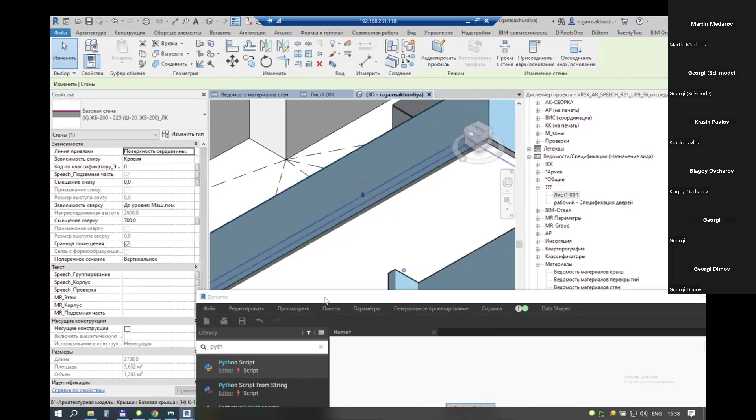I just need some parameters. I want to show you some parameters, and after that we will make the new task for ChatGPT. For example, let's say we need walls with more than 5 square meters area. So: filter me all walls with more than 5 square meter area. The name of the parameter - because I'm using the Russian version of Revit, area is called not 'area', it's called another word, but the idea is the same.

I'm just trying to help ChatGPT understand my case better. Now it's starting to write the script, as you can see - it takes just a few seconds to understand what you need. But sometimes, of course, the result isn't clear. As you can see, it already created the code for the 5 square meter filter, and it's using the lookup parameter, which I'm using in my Revit. If you're using the English version, of course, here it will just say area.

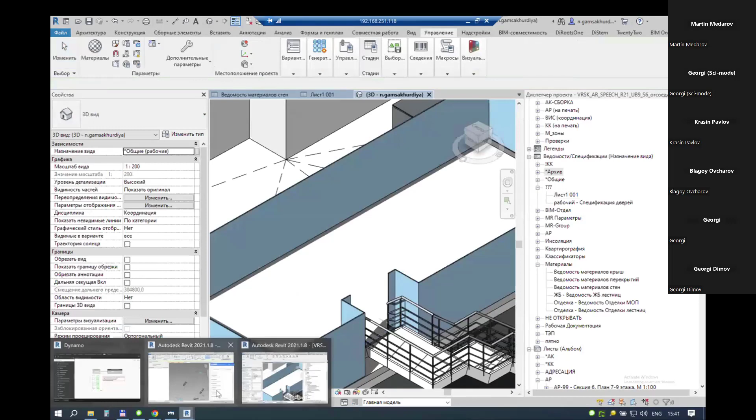I hope it's not crashed. Where is my Dynamo here? It's here, let me find this area. I want to just check if it's everything right or not. Oh my God, how it makes things more slowly.

Yeah, everything's right, as you can see, more than 5 square meters. Awesome, so it's working. And now after that, we can do more and more things.

For example, you need 5 square meters, maybe you want to change the name or something like that. For example, we have the naming of our walls and we have to change the naming. You also can create the program, you can ask ChatGPT to change it.

Let me try now what I can do. Actually, I don't have any ideas. Maybe you guys have ideas, and we can try some simple things which won't take a lot of time. We can, for example, ask...

Give me back walls only in level 3.

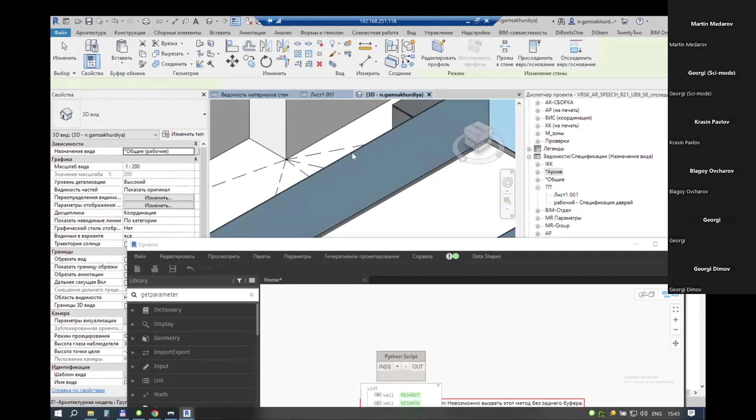It's really hard because I should first check how the level is called in my case, because, as you know, if you're working in Revit, you can change the name of the level, and sometimes it won't be like level 3, it may have another name. For example here, as you can see, it's a really different name.

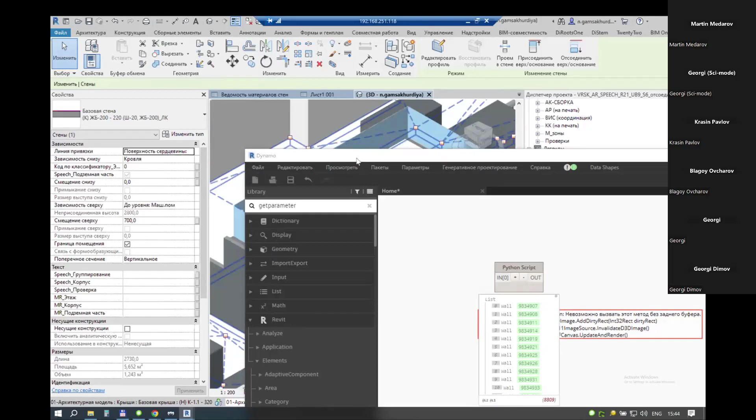Give me a second, I will select another wall. You can ask why it's really working slow. Actually, I'm showing you everything in a really huge project, it's like thousands of square meters, and that's why it's not working well.

But I want to show you how powerful it can be, for example, using a Python script with AI, to achieve your results.

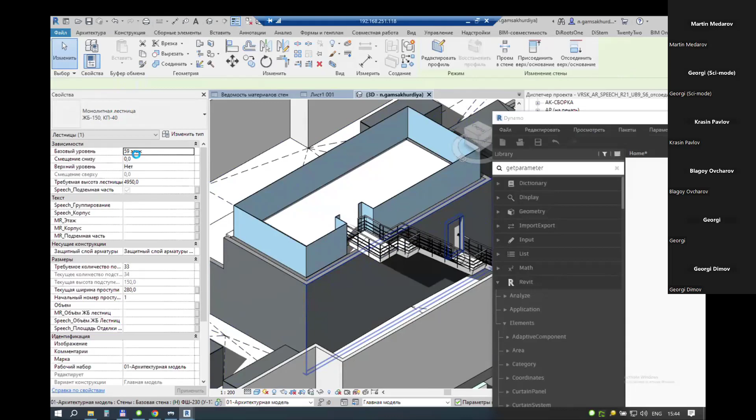Give me a second, here's the wall, and I want to check. Okay, I know now how to call the levels. Level 3, which has the name like this. And now it will be changed with a Python script, and we will see how it's working.

So here's our code being written. By the way, all this code you can, of course, use not only for Dynamo, I'm just showing you the example. You can directly ask, for example, for PyRevit. As I know you already know what PyRevit is and how to use it.

And you can, for example, not write for Dynamo, but ask to write for PyRevit, or write for Revit... I mean PyRevit.

Just a second, done. So here's the string, as you can see already. And let me just replace this code. Replace, and maybe we'll get it from the first time.

It says level not found. It can be like this, actually. It can be, but I don't believe that.

Let me change level 3 to the level 58, 59, because I know exactly we have walls on this level. Let me do like this. Oh, and we found it.

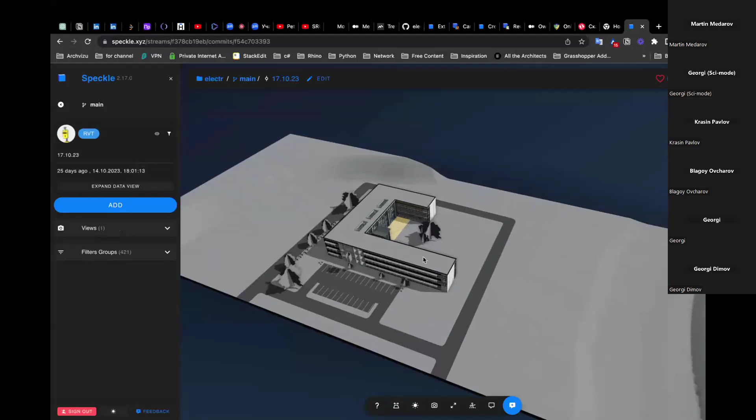Here is our model, as you can see, and all information here we have. For example, if I select this wall, I can see all information inside of this wall. If you think that's it, no. Under the parameters, you will find more and more parameters of what we have inside the model.

As you understand, we can actually create some program by AI, which will work with all this data. So you can go back, for example, to Revit. I will close Dynamo, we don't need it right now.

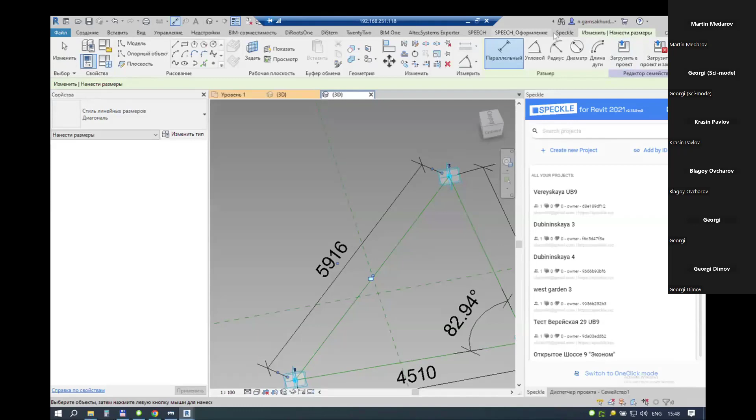You can go to Revit and use, for example, the plugin which is here, Speckle. You can send your model, and after that it's like the database. You can work with all information from this model. You don't need to use Revit to analyze your data. You can send it somewhere and work without the problem.

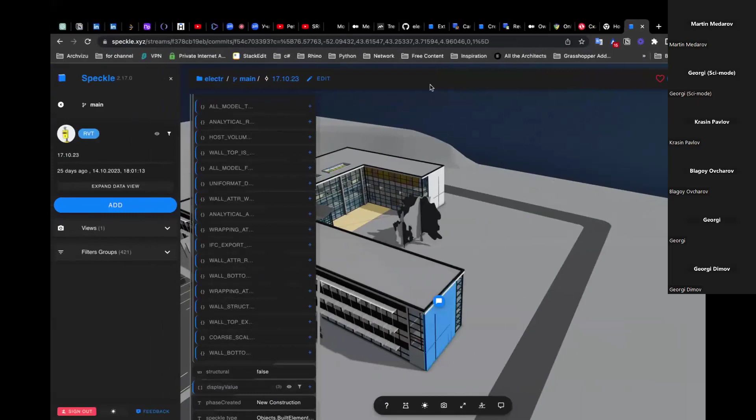For example, here I have my model, as you can see. Let me show you a much bigger model, because this one is small, and I don't like when the model is small. Okay, let me show you the big one. Here we have the model.

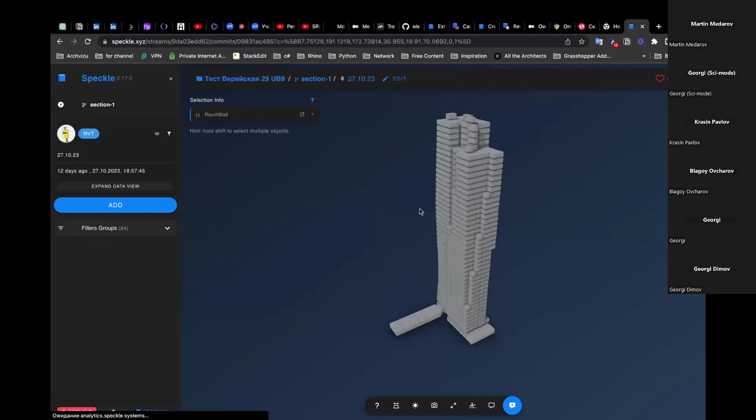We have two sections - this is section 1. Let me open it to show you. Here, inside Speckle, I have only the rooms because I want to calculate only data from the rooms - that's my goal, as you can see. All the rooms were exported from Revit, so now I can work with this data.

So what I can do - I already wrote the program. Where's my PyCharm? Here is my PyCharm, and you can see it, Speckle AI, the name of the program. Let me start this program. For example, what I want to get from this model - actually, all this program I wrote by AI without anything, only AI. I didn't write any line of the code myself. Only AI wrote all this code.

If you want to know how I did it, you can check, for example, my blog - I don't know, maybe I will share it later, and you will see my journey how I did it. I started from scratch, as you can see, and after that I was asking for ideas on how to do that, and step by step, from this small piece of code, I created this huge one, which you can see right now on your screen, with a lot of different modules.

And now, what can this code do? For example, this code can analyze the data which I sent from Revit to Speckle, and as I said before, I'm using Speckle like a database. Now I can get some information like file name, room numbers of the rooms, and so on.

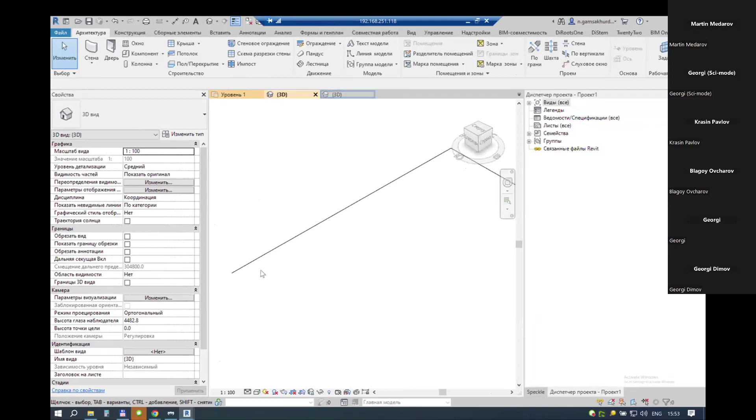And as you can see, not any big problem. It's really nice because I don't need to go back to the Revit, I don't need to open each file, I don't need to open each schedule and check my data. I can do it directly in Speckle. So why am I showing you Speckle and why am I telling you about it?

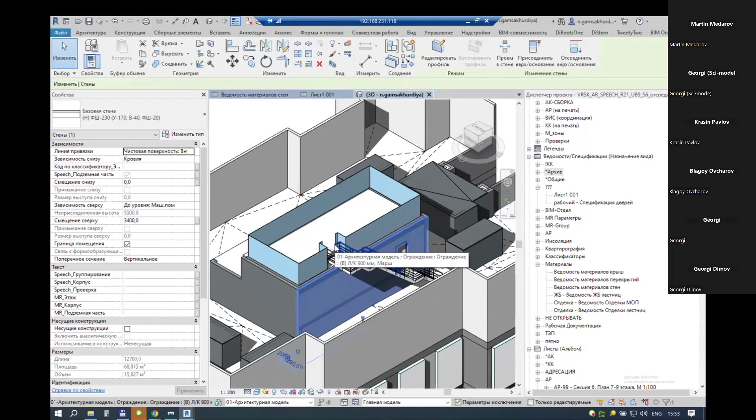Because when you're working in Revit, if your project is not big, you can create any script with AI and Dynamo. You can use Dynamo, import your script, and it will work perfectly. When you're working with a bit bigger project, it will be nice to use PyRevit. But when you're working with huge projects, you need somewhere to store your data.

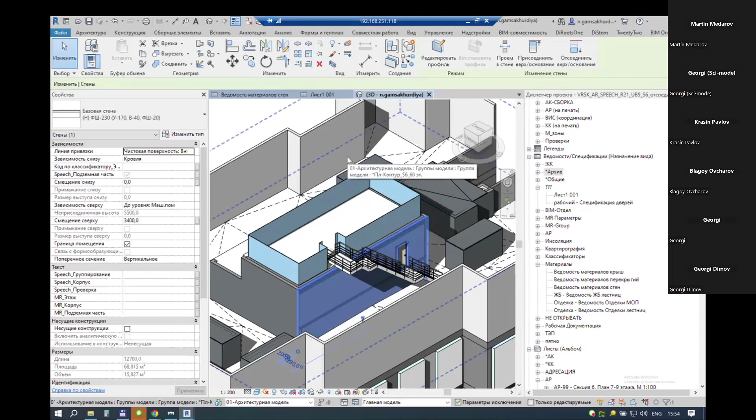Okay, I need a bit of water, and maybe any questions at this stage.

Sure, take your time. Thank you for these very interesting insights. In fact, there was a question here in the chat. Can you directly see the chat, or do you want me to read it for you? It's okay, I can read the chat. Give me a second. Where's my chat? Here, chat.

Bing... no, I didn't use Bing. You mean Bing like AI, or does Bing have its own AI? They're actually using Microsoft working with OpenAI. So Bing is using OpenAI, equal to ChatGPT, but a much lighter version. So yeah, as I remember, Bing uses OpenAI.